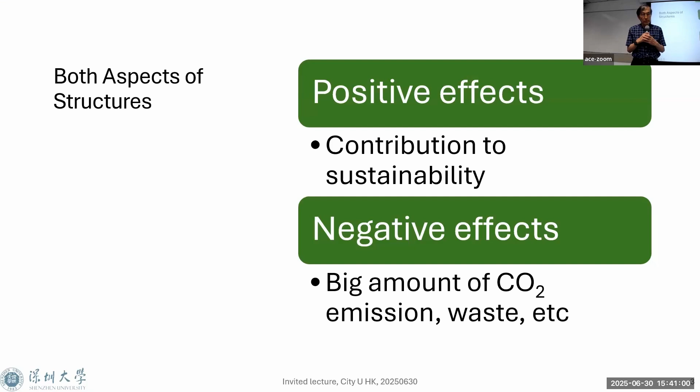So it's about various issues, like zero hunger, quality education, gender equality, but at least goal 9, industry, innovation and infrastructure, from the name of the goal you can tell is related to civil engineering. Also sustainable cities and communities is closely related to civil engineering. Climate action, this is net zero, carbon neutrality. But what I'm going to tell you is something

more. Once you say sustainability, most people think about environmental issues. But in fact, sustainability is quite a broad concept, which has three pillars: social, environmental, and economic sustainability.

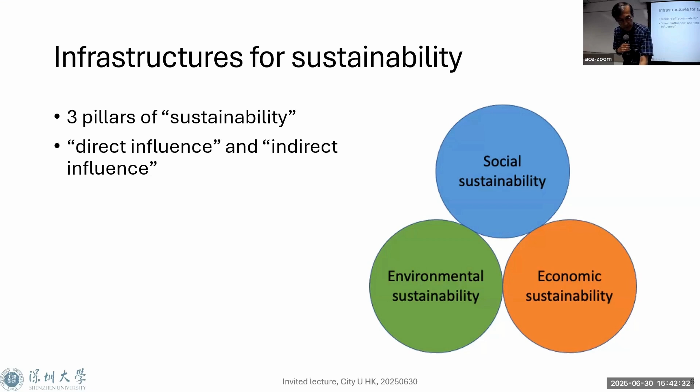This is another paper, which you can find in Nature Sustainability, Infrastructure for Sustainable Development. This paper looks in detail at how infrastructure can contribute to the SDGs. As I said, the SDGs have 17 goals, but under the goals we have targets. Targets show more quantitatively how to achieve the goal. So altogether, 169 targets.

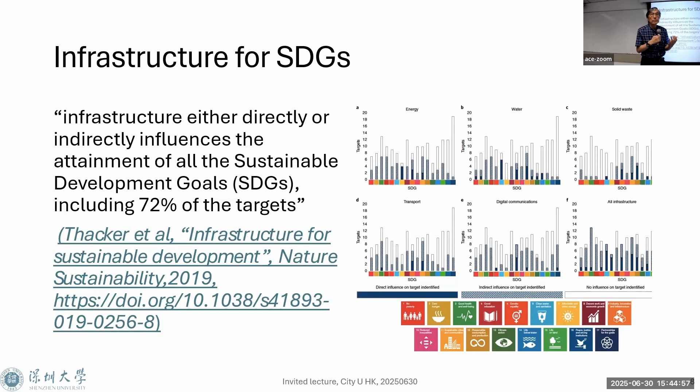In each small figure, the black part indicates infrastructure can directly influence achieving that particular target. The gray one indirectly influences achieving such targets. Then altogether, 72% of targets are influenced by infrastructure. Then you can see all the gray parts. You can find all of the 17 goals, even gender equality and quality education, and how infrastructure influences those goals.

This is a document more related to civil engineering. The author is Andrew Minson, Global Cement and Concrete Association, an international industrial organization for the cement and concrete industry. He examined very precisely how concrete or concrete structures influence every one of the 169 targets. His conclusion, of course, is his own analysis, not the UN's, but 48%, nearly 50% of the 169 targets will be influenced by concrete or concrete structures.

Then how can gender equality be achieved by concrete or concrete structures? How can education quality be achieved? This is one example. In many developing countries, schools don't have clean toilets. Boys don't care, but the girls are ashamed to go to school because there are no clean toilets. So with concrete as an inexpensive material, together with bricks, you can build clean, neat toilets so that students can go to school. It's good for gender equality and quality of education.

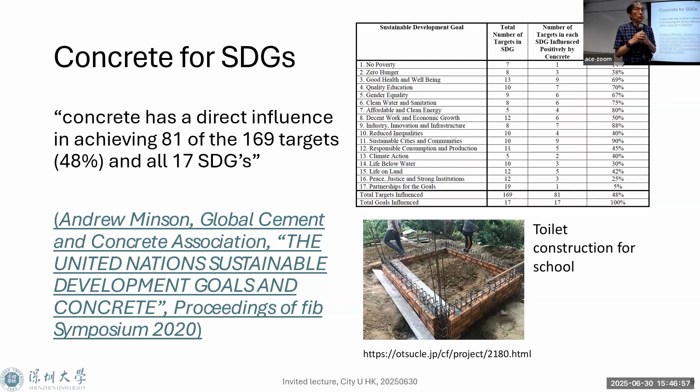The same paper looks at those listed papers in different aspects. Which pillar they're looking at: social, economic, or environmental. In the past, sustainability meant only environmental issues, so most papers look at environmental issues, not economic or social issues. But this is quite natural, I think. Another aspect, once you look at the structures, is which stage of the structure: planning stage, construction stage, usage stage, demolition stage.

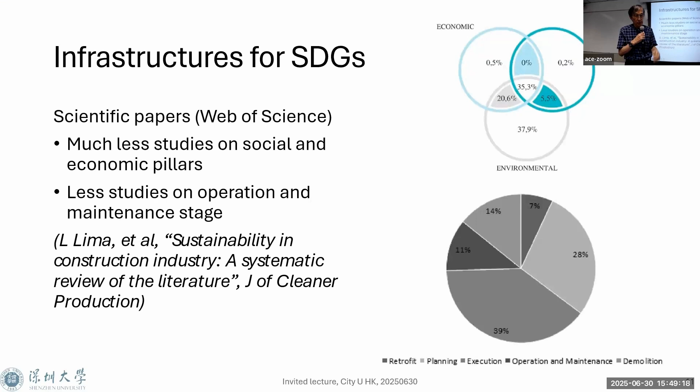Especially, I have to emphasize China. I think this statistic, I don't know if it includes Hong Kong or not. China alone, their construction market is more than 50% of worldwide construction. So China is really constructing a lot.

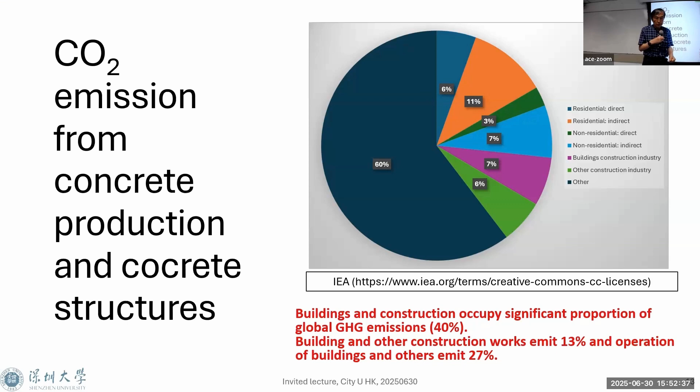After construction, during the usage stage, we emit a lot of CO2. This is another way to look at CO2 emission, by sector in different categories: 6% from cement, 8% from steel. Cement is 100% construction industry, but steel is not only construction industry, majority construction but also other industries. So cement is quite a big component of CO2 emission, so we have to take some serious measures as civil engineers.

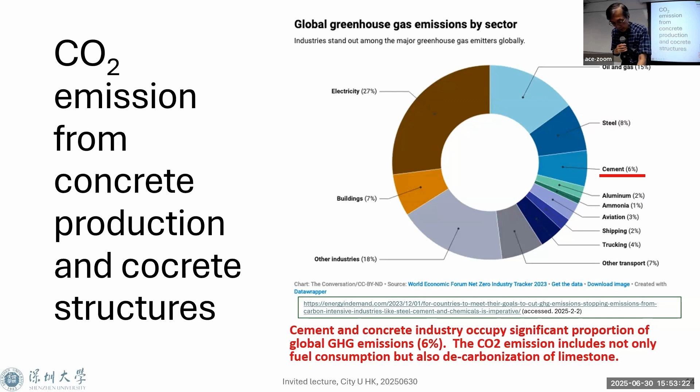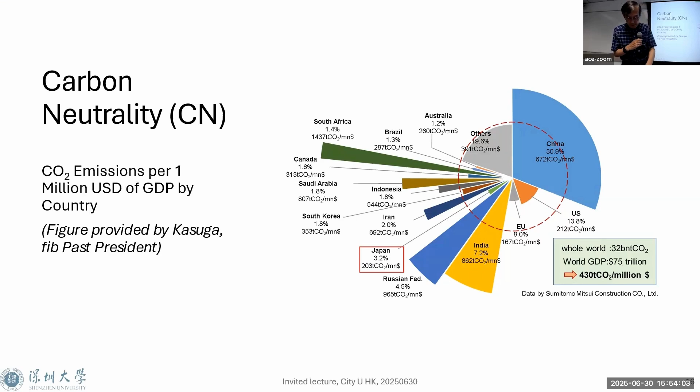But some good news for China: CO2 emission per unit economic activity has reduced drastically in recent years. The latest figure in this diagram is from 2017, but the real latest statistics show the level of CO2 emission per unit economic activity is very similar to the EU, Europe. So China really developed relevant technology, and in this sense it's almost the same as a developed country.

I found another interesting book. It shows how China faces challenges to achieve net zero in terms of energy. Probably you know China is the best country for wind energy and solar energy, extremely big energy production. But China itself has some difficulty achieving net zero because of coal power plants. You still need a lot of electricity coming from coal-fired power plants.

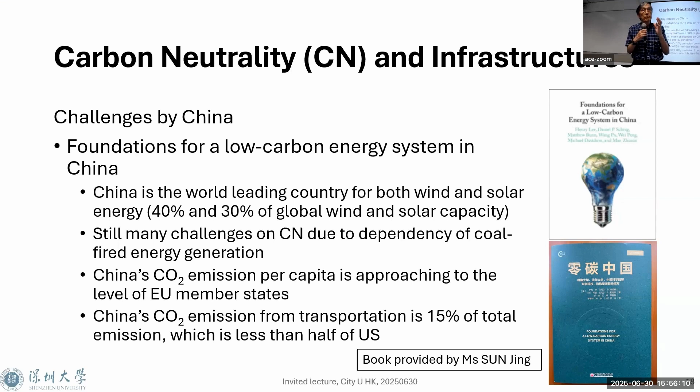If you compare with the United States, CO2 emission from transportation in China is much smaller than the US. Similar size of country, but transportation CO2 emission in China is much smaller than the US, meaning you have rather good public transportation compared with the United States.

Carbon neutrality, in terms of the size of the construction project: this analysis indicates that if you have a bigger project in terms of money, your CO2 emission also becomes bigger. It's quite a proportional relationship.

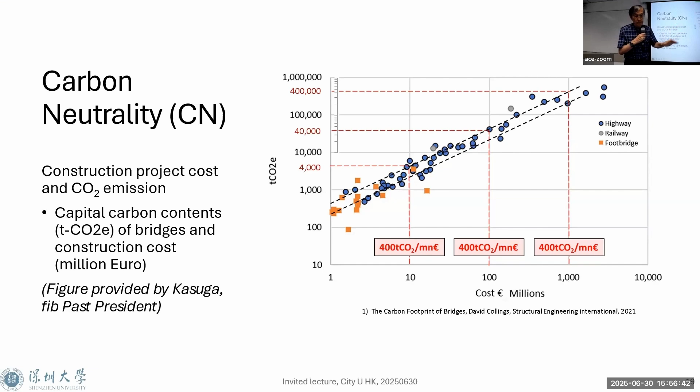This information is given by the World Economic Forum Net Zero Industry Tracker. They picked up some industries, including cement and steel. What are the key issues to achieve net zero by 2050? They have 5 important factors. One of them is infrastructure, which is quite important for those industries to achieve net zero.

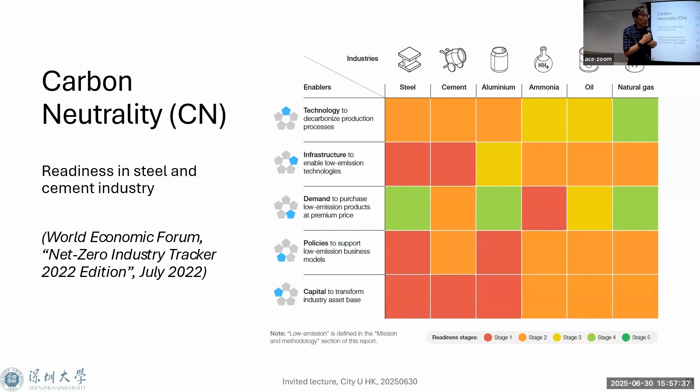This is a more precise analysis for the steel and cement industry. Green means they are ahead, at a rather advanced stage. But cement and steel are mostly red and orange, so it's quite still at a primitive stage. We have many things to solve.

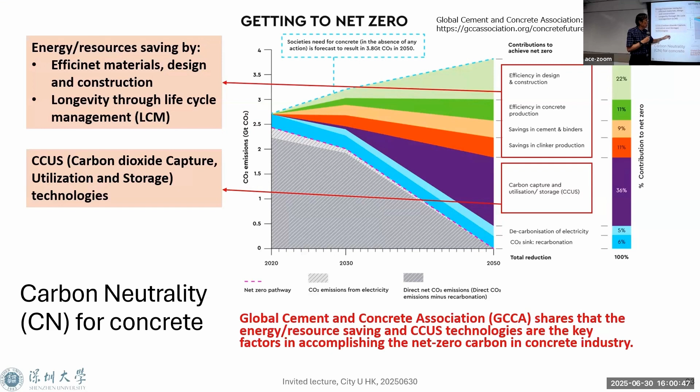A quite big portion comes from life cycle management, good maintenance, good intervention. This is what I'm talking about later today. Also, as the previous slide indicates, some material technology, CO2 capturing new material, and storage facility also needs concrete. So altogether, somehow they believe we can make net zero by 2050.

And this is a slide for steel. I'm not really an expert in steel, but the steel industry has a lot of relevant technology: reducing CO2 emission during steel production using hydrogen rather than coke, using green electricity, capturing CO2, using recycled steel. In fact, steel is a very, very recyclable material compared with concrete and cement.

Steel itself is a main material for infrastructure. So for all the relevant infrastructure to achieve CO2 emission zero, we also definitely need steel.

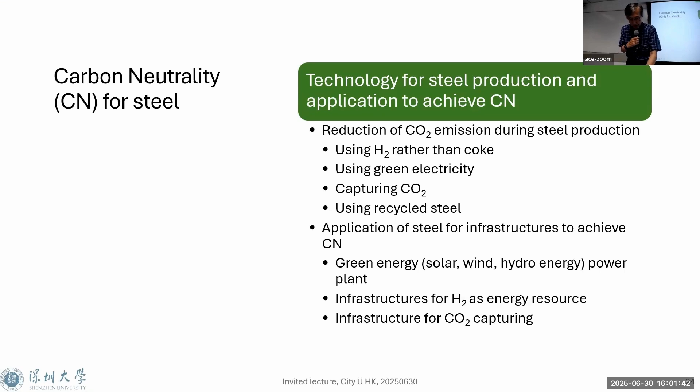This slide gets to my main agenda today. So far, what I've said, like cement industry technology or steel industry technology, this is only the production stage—how you reduce CO2 emission during concrete production, cement production, steel production. So this has been their main concern so far.

During the construction stage, yes, we also emit CO2, but compared with other stages, it's not such a great amount. At this moment, we have many studies on how to minimize CO2 emission during construction.

But we don't have much studies on this—during use. Buildings and other infrastructures have a life of 100 years, more than 100 years. During that period, naturally, we have a lot of CO2 emission.

At the construction site, we have repairment, refurbishment, right? Some maintenance—it's also part of kind of construction work. So we have to carefully consider those maintenance plans so that we can minimize CO2 emission.

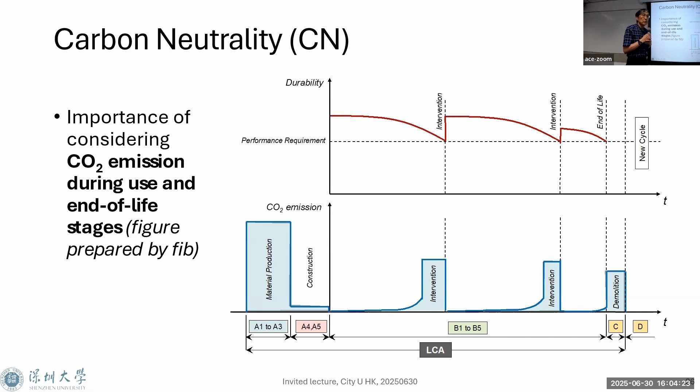The mid-90s was quite a big construction market in Japan. At that time, Japan was #1, bigger than the US, bigger than China. But after that, our construction market became very, very small. I don't have to talk about it much.

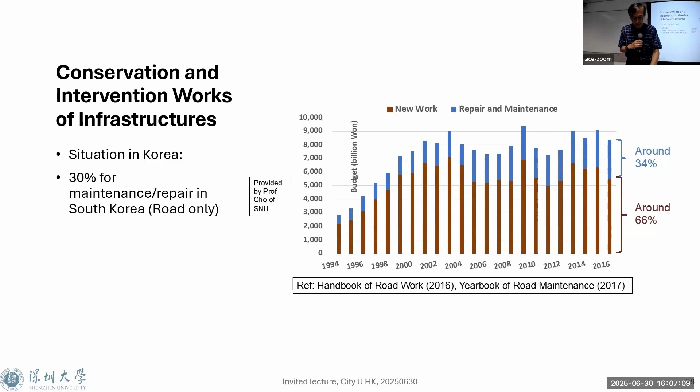And UK, this is a country, I believe, they developed the infrastructure nationwide first, probably. There are subways since the 19th century. Many, many bridges. Their first steel bridge or iron bridge is 250 years ago. In such countries, we still need new construction. They nearly need to reconstruct old construction structures.

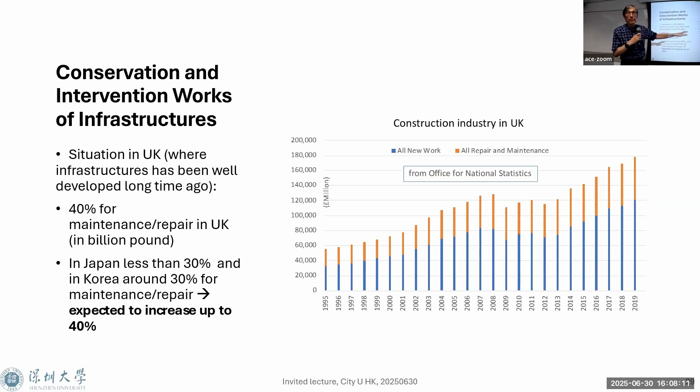But this orange part is maintenance. So this country, UK, about 40%, nearly 1/3, is going to maintenance repair. So this is indicating most of the countries like China and Japan, their future is something like this. So about 40% is maintenance repair.

Then coming to the Japan Society of Civil Engineers. I have been involved in this society for many decades. And in recent years, we have some activities for carbon neutrality.

So this is indicating current technical activities related to carbon neutrality. Many technical committees, they are looking at carbon neutrality in different aspects. And also our monthly magazine, one time, about nearly 4 years ago, they had a special issue on carbon neutrality.

And the AIJ, this is Architectural Institute of Japan, and Japan Society of Civil Engineers, two big organizations in the construction field. We have collaborative work on carbon neutrality. Sorry, this is in Japanese, but it is in a special issue in the JSCE monthly magazine, how carbon neutrality can be achieved by 2050.

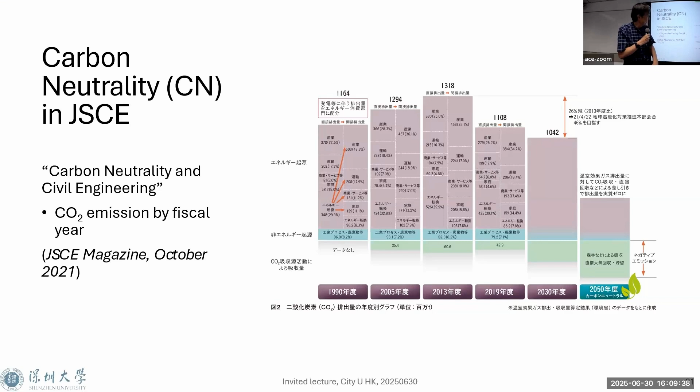This is the general overall scenario. And this is indicating how civil engineering can contribute to carbon neutrality in many aspects: industry, mobility, town, home, energy, and others. In many aspects, civil engineering needs to contribute to carbon neutrality.

Then also JSCE, 3 years ago, they published one small booklet to show how society or the nationwide social system is related to infrastructure or civil engineering. It's kind of the nationwide community network, including transportation or so on.

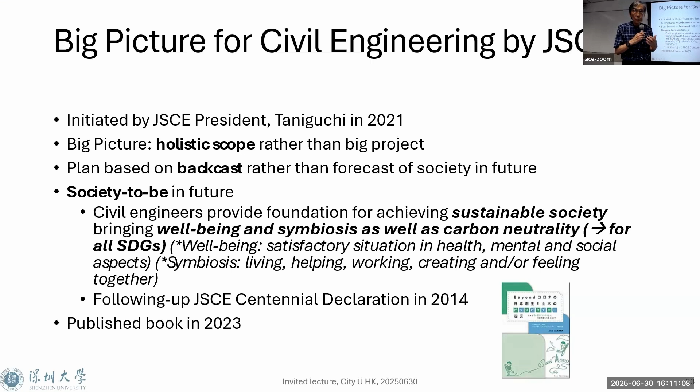Then they are saying we have to provide the foundation for achieving a sustainable society, bringing well-being and symbiosis as well as carbon neutrality. The JSCE, as a representative organization, shows the Japanese society how our future landscape should be.

Then this is another piece of information. Carbon neutrality is not free. We have to pay additional cost. Several articles say we need something like 6% more cost compared with overall economic activities. So we have to pay a few percent up to 6%. This is the additional cost to achieve carbon neutrality.

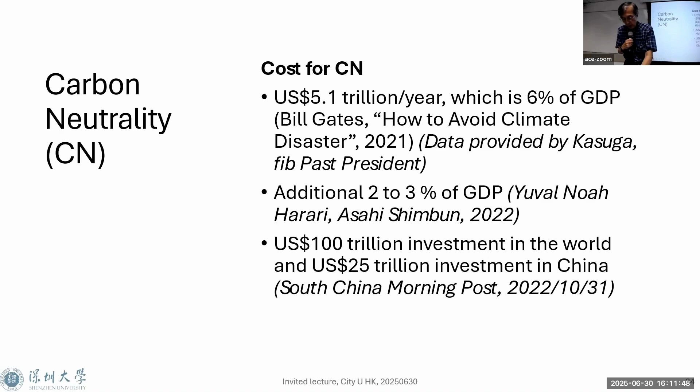Then this is the summary: contribution of infrastructure, life cycle management of structures for carbon neutrality, green materials, execution, maintenance, intervention, demolition, or so on, and infrastructure. So the summary is how structures, how civil engineering can contribute.

First one, life cycle management, good maintenance, repair. And also green materials, execution, and demolition, and so on, and also circularity. And also infrastructure itself, we need it to achieve carbon neutrality. Lots of infrastructure, relevant infrastructure.

And also transportation system. Yeah, this is not today's issue, but we have some transportation systems which are suitable for carbon neutrality, and national land planning. It is community network, how we allocate big cities, small cities, and how they are connected, this kind of thing.

So this is my main issue: extension of service life of structures. Once your service life becomes 3 times longer, then carbon emission, CO2 emission becomes 1/3, right?

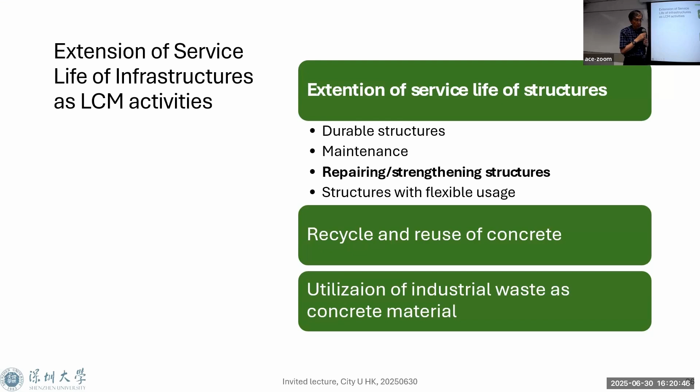And this is somehow relevant technology, a very small summary. To have good maintenance, we have to predict your service life, how to predict the service life of structures. And also assessment of the current structure performance. You need a good inspection system.

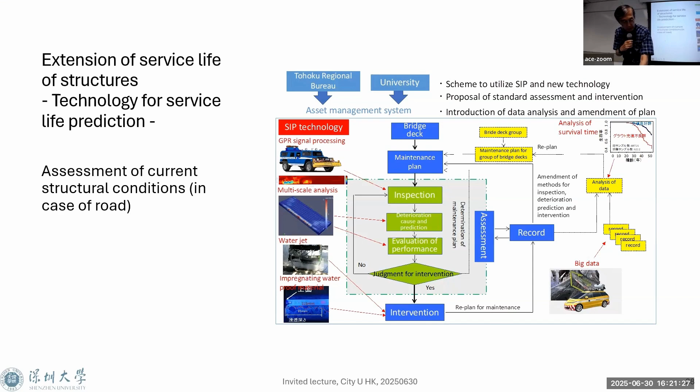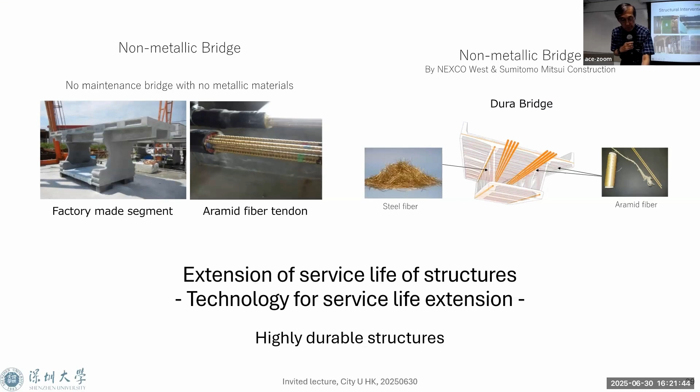Recently, we have a lot of relevant technological advancement. And I don't have to say, once we have provided maintenance-free material, very highly durable material, of course, it's also good. And this is showing some typical structural interventions, which I'm talking about today. We have various ways of interventions using different materials.

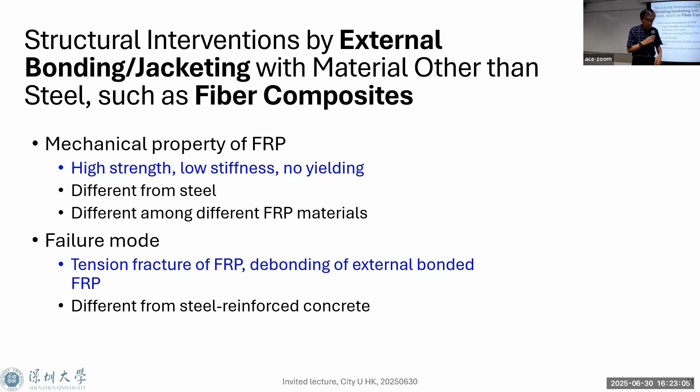The failure mode is also different from ordinary reinforced concrete. Once you use FRP reinforcement, breakage becomes a failure. And also, once you have external bonding, debonding is another failure mode. So they are different from ordinary steel reinforced concrete. Then we have several key issues: shear strength and ultimate deformation, debonding, and long-term performance.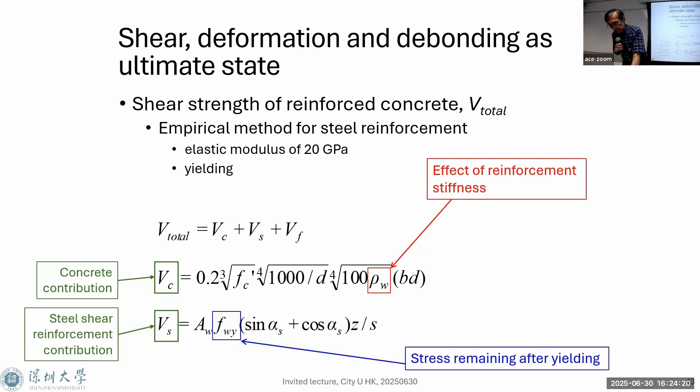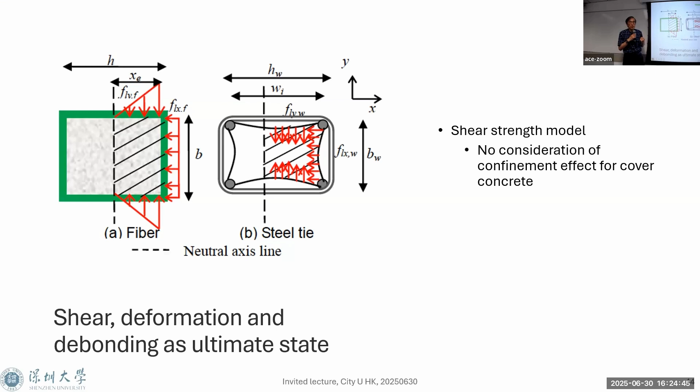Then we have jacketing like this. We jacket or wrap tension material surrounding the concrete. Then we have some confinement effect from the wrapping material, which does not exist in ordinary concrete structures without wrapping. For seismic performance, we have to know the ultimate deformation, but we don't really have a commonly accepted model to predict ultimate deformation, which is quite important for seismic design.

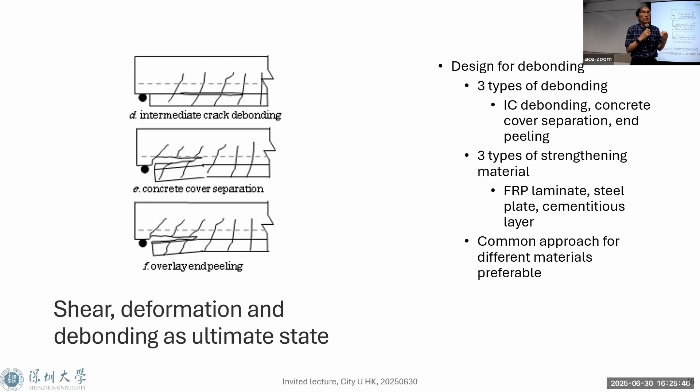Then in the external bonding case, we have several debonding modes. Not only one mode: we could have debonding here, or we could have debonding we call concrete cover separation, or we could have debonding like this. Each debonding type has a different mechanism, so it makes it very complicated. Debonding happens at a certain location, it can be the central part of the beam or the end of the beam, so you have to be careful where debonding takes place.

Debonding takes place at the adhesion interface, or within the substrate concrete, or within the adhesive material itself, or within the strengthening material itself. So you have to look very carefully at where the debonding location is. In fact, debonding is very complicated.

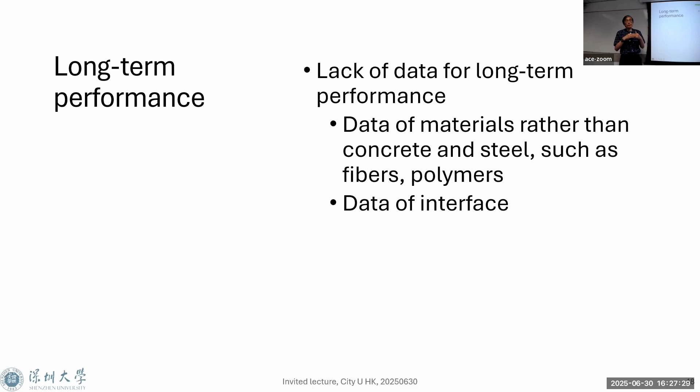Then long-term performance, I talk about it only with this slide today. We don't have much information. FRP is one of the main materials, but we don't have accumulated knowledge or information on long-term performance. Probably the only available data is a 30-year exposure test. So we don't know the 50-year or 100-year life of FRP. And not only the material, but also the bonding interface properties: we don't have much information on long-term interface behavior.

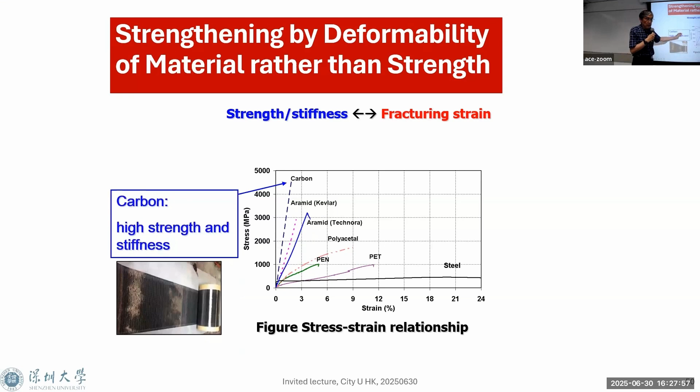Then the first issue, shear strength and ultimate deformation. These are various tension reinforcements. This is steel and carbon, with quite different stress-strain relationships. We try to utilize them as reinforcing material. Carbon has high strength and high stiffness. The other extreme is steel, low strength and low stiffness. In the middle, you have medium strength and medium stiffness.

What I can say is high strength material is usually expensive, and lower strength material less expensive. So high cost, low cost. But you shouldn't forget this point: high strength, but the fracturing strain is very small. Low strength, usually the fracturing strain is very high. In fact, not only strength, we have to utilize fracturing strain. Stiffness and strength can be replaced by a lower strength and stiffness material if you provide a larger amount. So high strength material is not absolutely necessary.

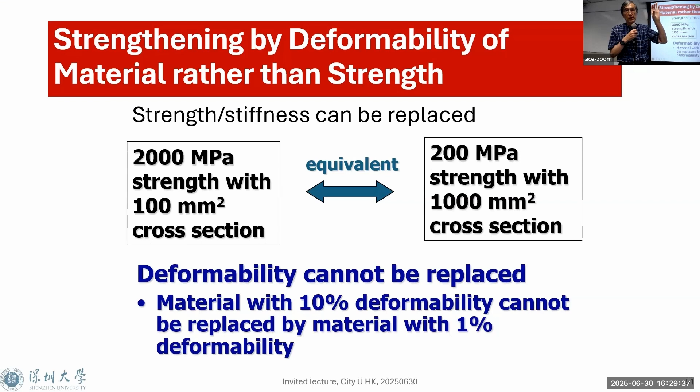But if your design says we need deformability of the material, high deformability cannot be replaced by less deformable material. So deformability is one of the key issues for seismic performance. High deformability could be a better option than high strength and stiffness in terms of seismic performance. Then a new retrofit method: durable and low cost, using fiber material with high deformability for shear reinforcement.

Yeah, in fact, what does this TV camera show? It's okay? Yeah, yes, someone is working. I see, okay.

Like this one, this is carbon like this, steel like this, but as shear reinforcement, we need a big fracturing strain to achieve shear reinforcement until the ultimate deformation. Steel doesn't break, but its stiffness becomes very small. So to have a good shear reinforcement effect, stiffness is also important, but it cannot break like carbon. So a material between steel and carbon is the best option for shear reinforcement. Knowing this fact, we utilize highly deformable material at the hinges, which need more deformable material.

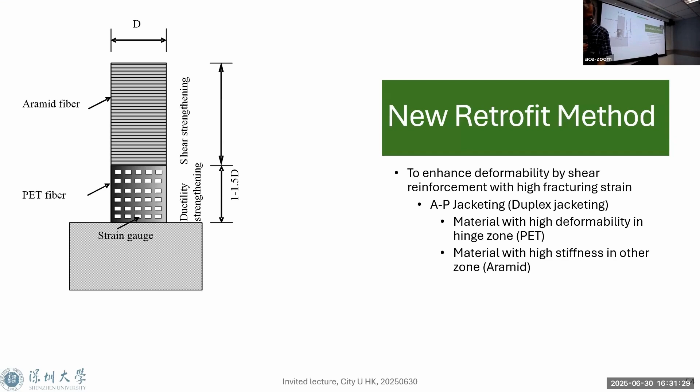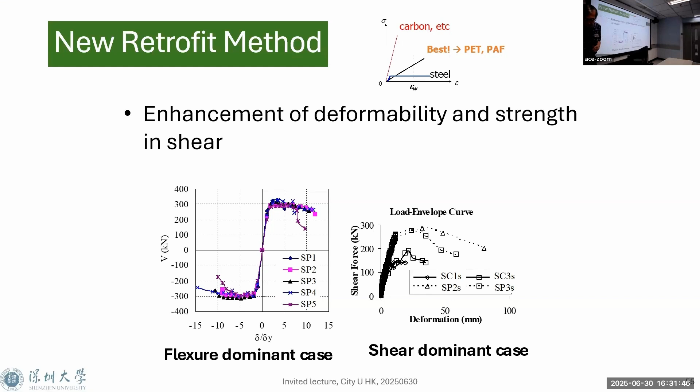Then once we use the deformable material, which is PET fiber, we can have better seismic performance, like this. So the specimen with PET fiber shows better performance than the carbon and the reference specimen. The specimen with PET fiber is like this, the carbon is like this, and the reference specimen like this.

So if your shear reinforcement doesn't show breakage, this is perfect. But you better still have rather high stiffness. Steel reinforcement shows no breakage, but yielding, so the stiffness becomes much less. This shows some experimental results. This PET fiber deforms greatly like this, but no breakage. If this is carbon, definitely the carbon breaks.

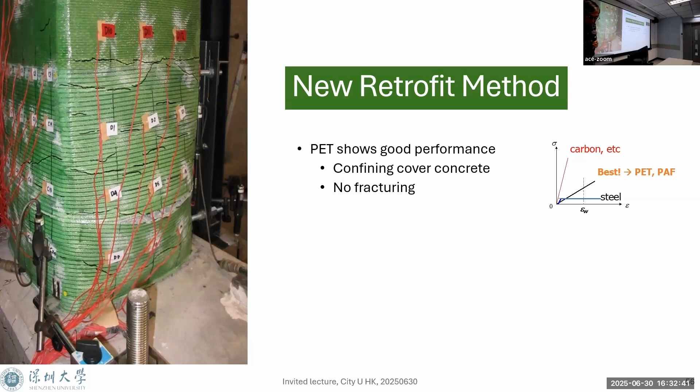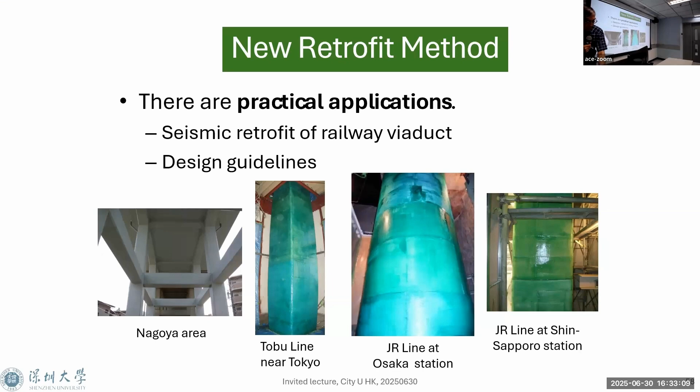And PET fiber is cheap, you can understand, right? PET is not expensive. So PET fiber is much less expensive than carbon or aramid, so the construction cost and material cost is cheaper. So in Japan, we have PET fiber real application like this. So the optimal property is not only stiffness, but also deformability. This is quite important.

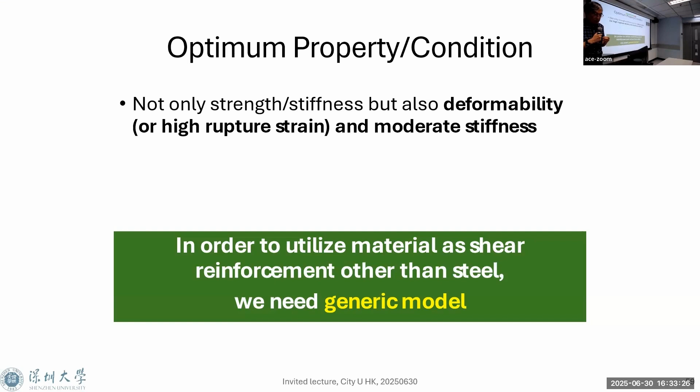Then to deal with this kind of different mechanical property of the material, we need some generic model. So to have a generic model, our research group proposed some model which can predict shear strength and also a shear deformation model. Probably I may not go in detail. And also a flexural strength model and a flexural deformation model.

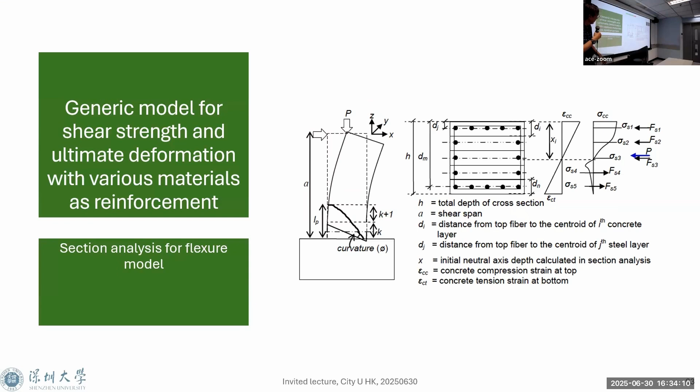So we combine them, considering each material's stress-strain relationship, and we utilize typical sectional analysis, and we consider the contribution of each component to the shear strength. Then we have the concept of potential shear strength depending on the deformation. So once we have greater deformation, meaning greater strain development and less stiffness, the remaining shear capacity becomes less.

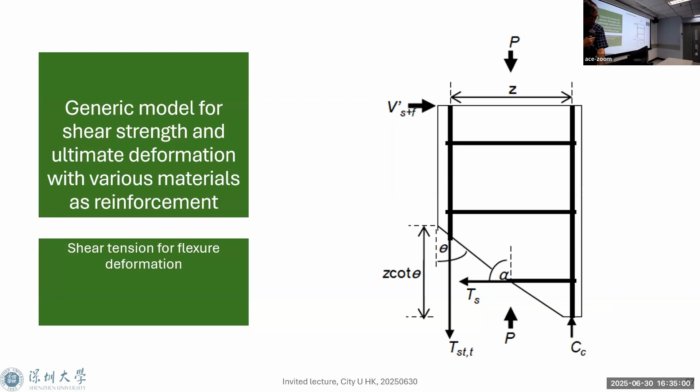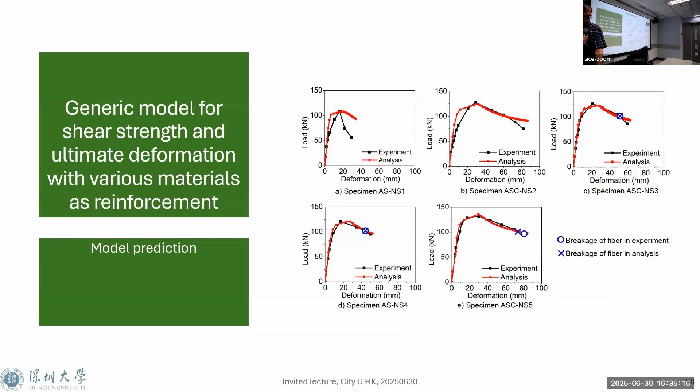And we also consider shear deformation utilizing a simple truss analogy. Then we can also consider tension shift in the tension reinforcement, which produces additional flexural deformation. Then this is the model prediction. Our model predicts, except this case, quite nicely for the post-peak region. So we can predict ultimate deformation, which is necessary for seismic design. The prediction and the experimental result agreed.

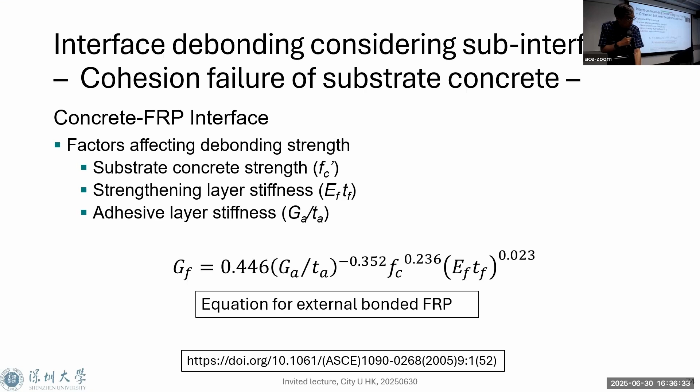This is an early contribution of Professor Dai Jianguo. He proposed this formula for his PhD study, in fact. Based on his study, better debonding strength comes from the softer adhesion layer. So a softer adhesion layer in the bond stress-slip relationship shows a much higher peak stress. But this is only true for the substrate concrete debonding case.

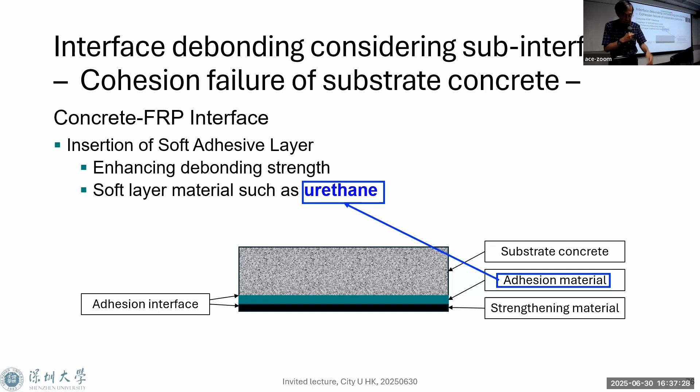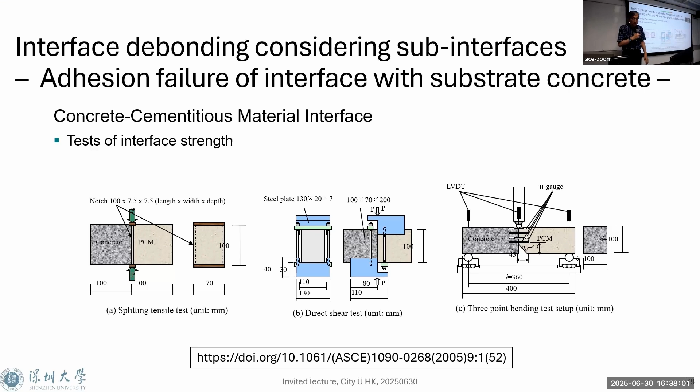Then, knowing this fact, some technology was developed using quite a low stiffness of the adhesion layer, such as urethane, so that you can have higher debonding strength. So a softer adhesion layer is one way to increase debonding strength. Then another debonding failure mode: debonding at the interface between substrate concrete and the adhesion material. We have another study looking at debonding strength for cementitious material failure. In this case, debonding takes place clearly at the interface between two materials.

In this case, concrete strength and interface roughness are the main factors, once debonding takes place clearly at the interface between two materials. In the previous case, debonding takes place within the substrate. If debonding takes place within substrate concrete, roughness doesn't matter. But at the real interface, roughness does matter. So this is the experimental result. As roughness increases, the bonding strength increases. But once roughness reaches a certain amount, about 0.5 millimeter, the bonding strength becomes constant.

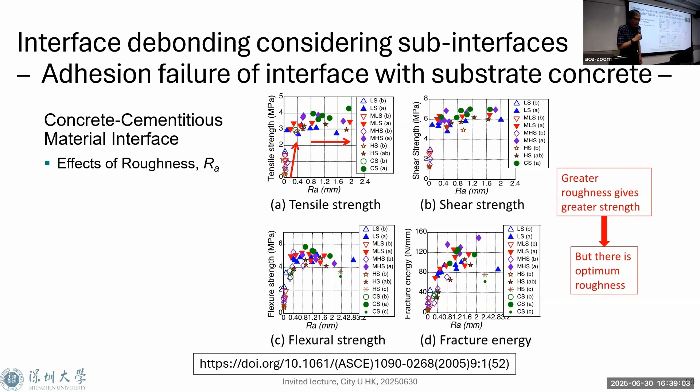Another interesting thing: if you have high strength concrete, the bonding strength becomes smaller. Because in this particular case, polymer cementitious mortar, polymer is one of the mechanisms to strengthen interface strength. But polymer cannot penetrate into high strength concrete. So to have better penetration, lower strength concrete is better. Lower strength concrete gives you higher bonding strength. It's something surprising. So again, strength doesn't work.

Then this is the case. Yeah, this is an external bonding FRP sheet. In the FRP sheet case, usually the debonding takes place in the substrate concrete. But when substrate concrete strength becomes very high, like 90 megapascal, then the debonding takes place at the interface, the adhesion interface between the adhesion material and substrate concrete. So if this is the case, roughness does matter. Greater roughness gives you higher bonding strength.

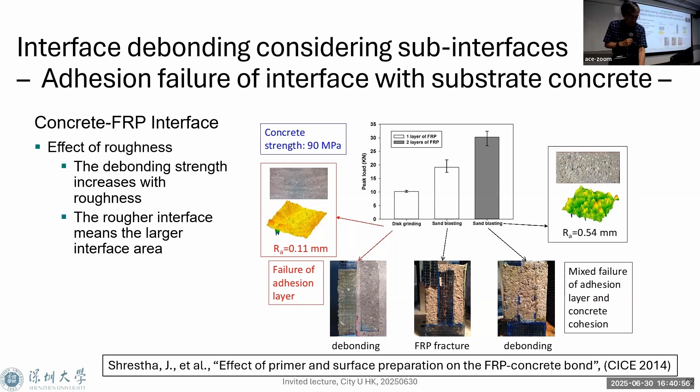This is different from the Ueda case. In the Ueda case, substrate concrete debonding. But this one, adhesion interface debonding. So surface roughness only affects in case of the real interface, the adhesion interface. Right, then debonding at the adhesion material layer. So the debonding takes place this time within the adhesion layer, within this one.

Then what happens? Earlier, as I said, if the debonding happens in the substrate concrete side, a softer adhesion material layer gives you higher bonding strength. But if the debonding happens within the adhesion material layer, softer material gives you smaller bonding strength. So again, it depends where your debonding takes place. So you can get completely the other outcomes.

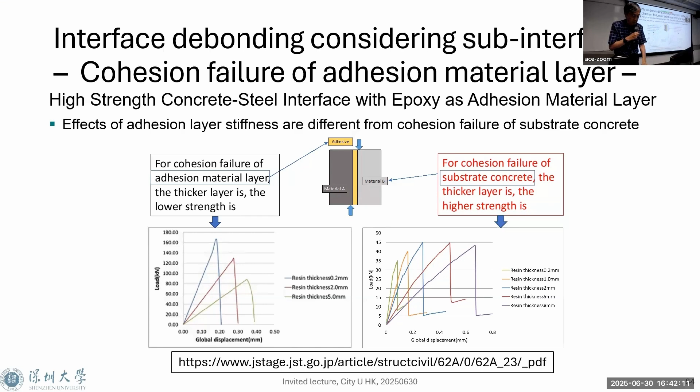In this case, a soft adhesion material layer doesn't work. But in this case, if the debonding takes place in the substrate concrete, a soft adhesion material layer does work. Okay. Then even in this case, if both sides are very high strength, the debonding takes place within the adhesion material layer.

In this case, usually this is a polymer. The polymer is confined, restricted in its shrinkage. So prestress is introduced within the material layer. So it affects and reduces the bonding strength. So we have many other aspects as well.

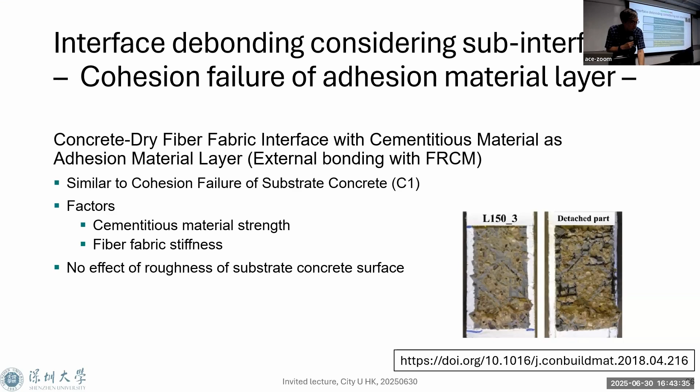Then this is a debonding case in terms of concrete with a dry fiber fabric piece with cementitious material. In this case, debonding takes place within the adhesion material. In this case, the adhesion material is a cementitious material, same as substrate concrete. So if debonding happens within cementitious material, like concrete, then the debonding nature is similar to the first case. So you have to be very careful where your debonding takes place.

The last one, debonding at the adhesion interface between the adhesion material and the strengthening material. So this time, debonding takes place between the tension material and adhesion material. In this case, I only found one case. In this particular case, the extent of cementitious material impregnation into the fiber bundles is one of the key parameters. More impregnation, the bonding strength becomes higher.

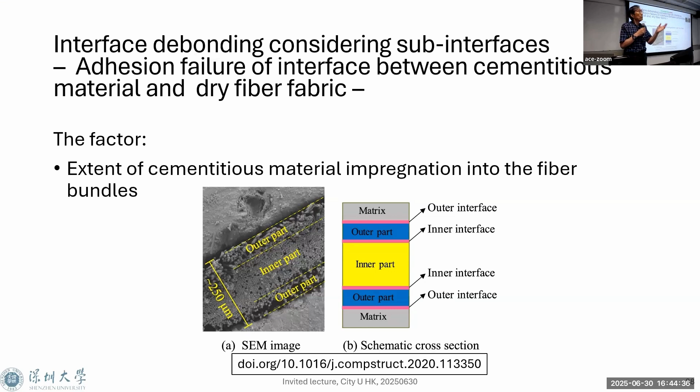So you have to be very careful where your debonding takes place. The controlling parameter is quite different in each case. Your conclusion may be completely wrong. So you have to be very careful.

And some other debonding issues, external bonding issues. Two issues here. The first one I briefly introduced. Yeah, debonding is a main issue, but recently, in a collaborative study, a Japanese university and a Japanese company found that with external bonding of the carbon fiber sheet, we can completely prevent the debonding. How do we prevent the debonding?

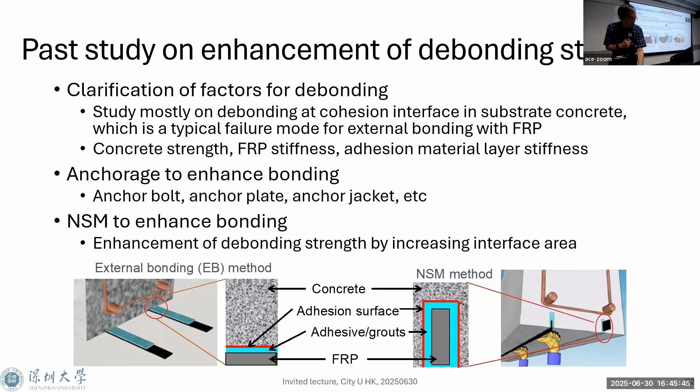Now, this is the usual way, external bonding like this, an FRP plate attached to the tension face. And the better way, we call it NSM, near surface mounted. We make a small ditch like this, a groove, then we insert the tension material. But even with NSM, you cannot avoid debonding. But with our new technology, we fold the sheet like this, then insert it in the groove to increase the interface area. Then, as a result, we can avoid debonding.

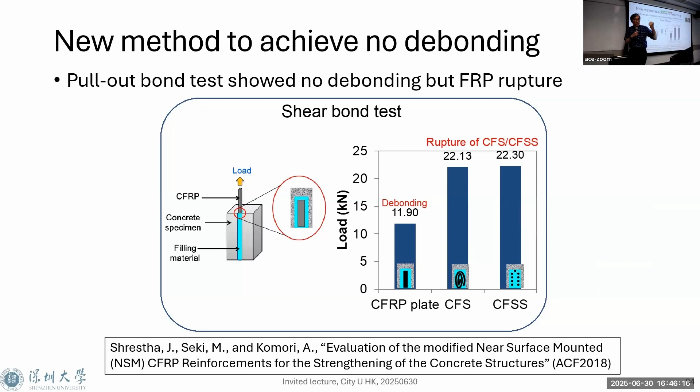So no debonding. The ultimate failure mode is fracture of the carbon fiber. Not only in the pull test, but also the beam test, the ultimate state is rupture of the carbon fiber sheet. So it's a perfect 100% utilization of the carbon fiber strength. So we are successful in avoiding the debonding.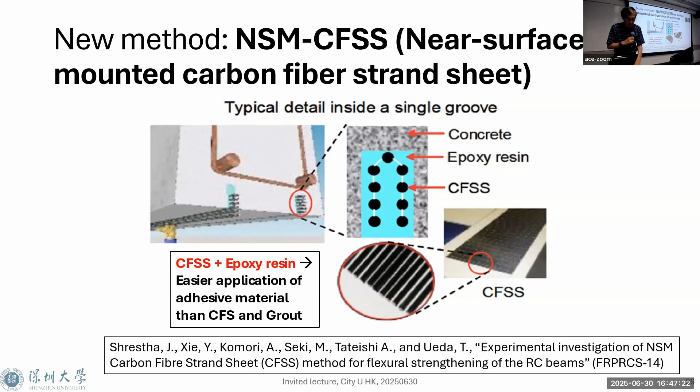Then our proposed technology is like this. This is a Japanese product. I think in China I found some similar product, but not really practically applied yet. Each sheet consists of a composite of very small CFRP bars like this, and they are connected to each other to make a sheet form. Then we fold this sheet, we call it the carbon fiber strand sheet, into the groove. Then we make an NSM. This is our proposed way.

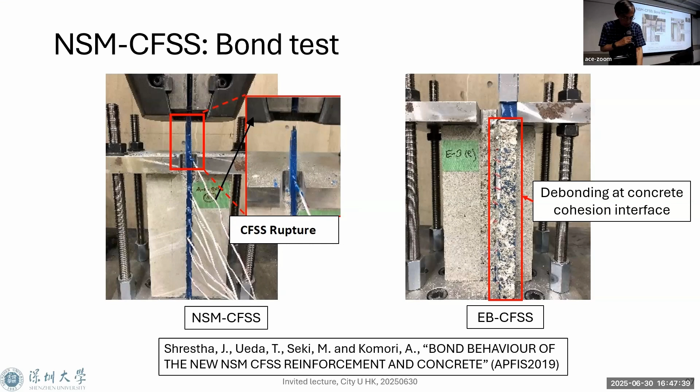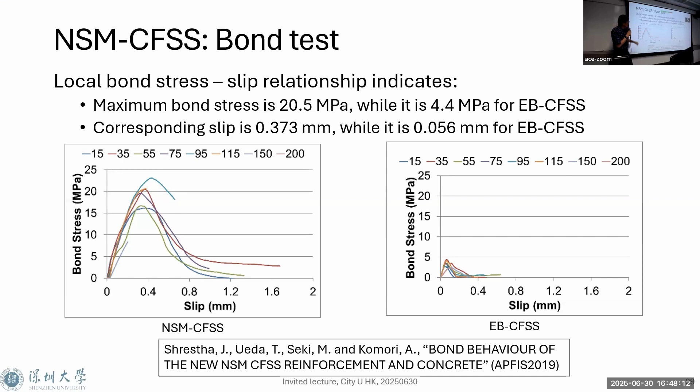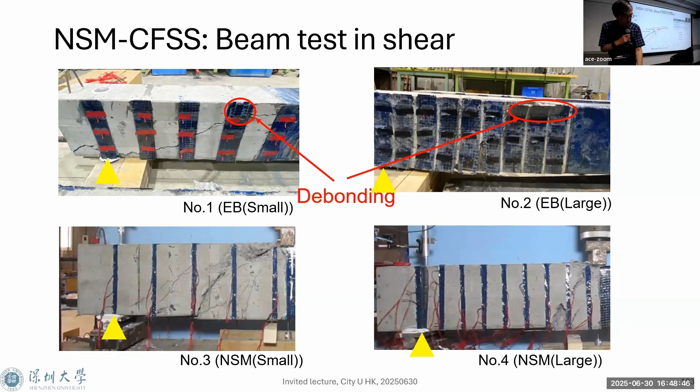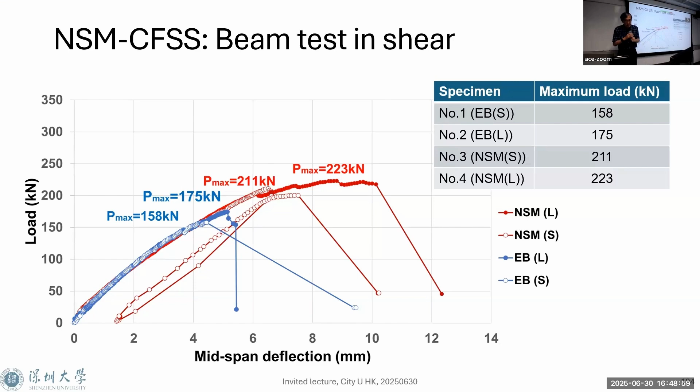And in this particular case, the increment is not great, but our new proposed technology NSM-CFSS achieves better, higher shear strength. Then we can utilize this technology to strengthen this part for shear reinforcement for the T-beam like this.

One more newly developed concept. For repair, this is an ISO document. We have many intervention principles or remedies, from 1 to 12. We have different purposes: protection against ingress, or structural strengthening, or this kind of thing. Measures for concrete defects and deterioration, measures for steel reinforcement corrosion, and strengthening.

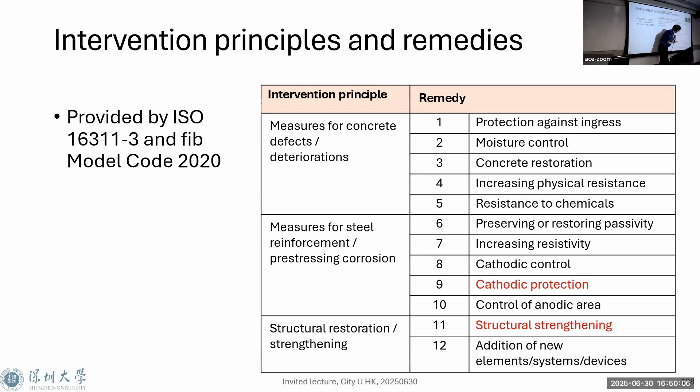Then, the new concept is that with one particular repairing method, we can achieve more than two remedies. For this particular case, using carbon fiber fabric, we can achieve structural strengthening, like the strengthening I have been talking about, and it can also be used for cathodic protection. So dual function.

Then we conducted many experiments to prove cathodic protection does work, but we have some degradation. Instead, due to the ICCP, the impressed current deteriorates the carbon fiber itself, in fact. But somehow, the fortunate part is once you have a chloride environment, deterioration becomes much less. It's something of good news.

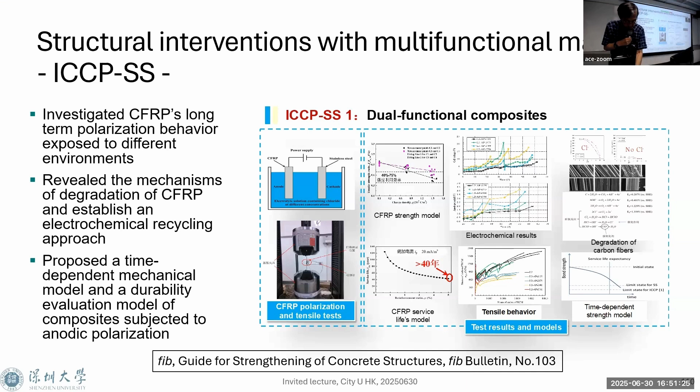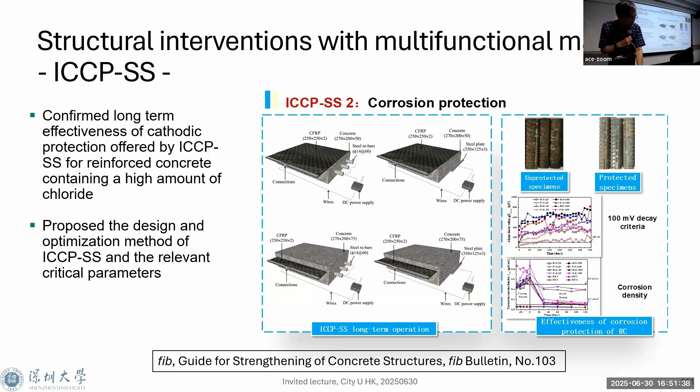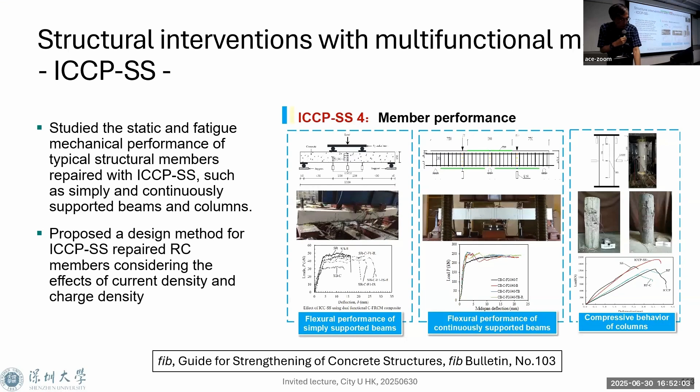Then we conducted various experiments; the right top here shows cathodic protection does work, and also some bond tests. We observe some deterioration, as you can see here, but once we can predict how much deterioration we have, we can have it nicely designed. And also we conducted many beam tests, column tests, and we have some practical applications of this ICCP-SS.

So this is a new concept, dual purpose. I have never seen something like this. All the repairing methods are single purpose. But this is dual purpose. This is also another new direction.

Then my last issue is standardization for life cycle management and carbon neutrality. Life cycle management is still a new concept in our structural engineering community, civil engineering. Also, a holistic framework: we have to achieve carbon neutrality, but in the civil engineering field, we don't have a really well-developed system for CO2 emissions, especially during the life cycle.

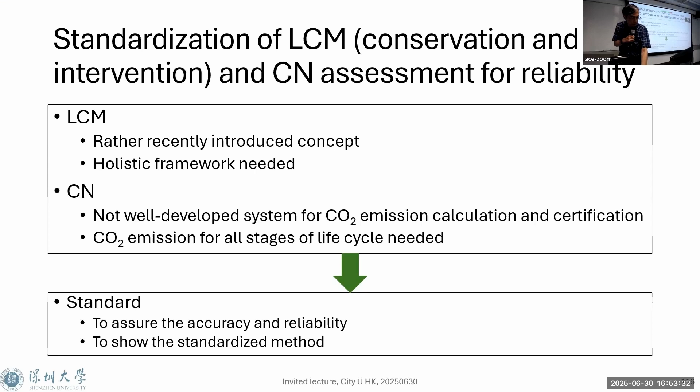To improve the current situation, standardization is necessary to assure the accuracy and reliability and to show the standardized method. At this moment we have too many methods for repairing. We should have something standardized. Then there's a lack of reliability due to lack of data, too many interventions, a big variety of structural details, a big variety of structural materials. That's why I ask, what is the optimum material property? We don't know yet.

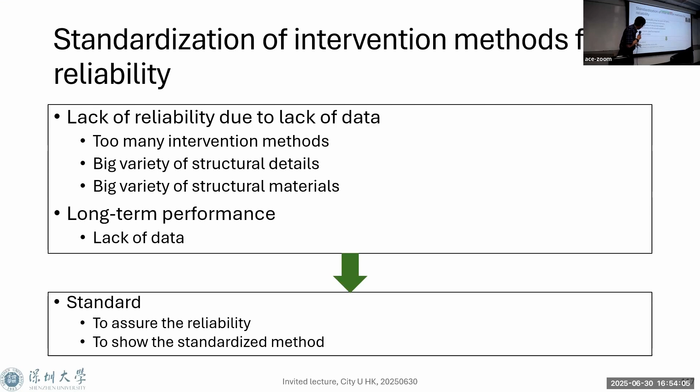Long-term performance, which I didn't talk about today, we don't have data on at all in many cases, especially the interface. So we need standardization to assure the reliability and show the standardized method. For this purpose, ISO, the International Organization for Standardization, has one technical committee dealing with all kinds of concrete issues. In fact, I'm chairing this technical committee at the moment. Subcommittee 7 is maintenance and repair, SC8 environmental management, like carbon neutrality issues, and working group 1, life cycle management. So the concrete community in ISO puts its best effort into international standards.

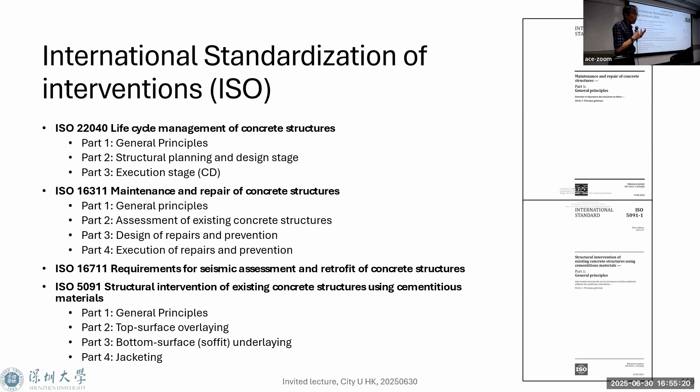This is a recent example, life cycle management of concrete structures. We already have some ISO documents available. The maintenance and repair of concrete structures is available, and this is a kind of umbrella. Then this is the particular repair and structural strengthening interventions ISO code, using cementitious material, as I said, externally bonded cementitious material. Some ISO documents are available.

Then fib, the International Federation for Structural Concrete, also put effort into the code, Model Code 2020, just published two years ago. The first international standard for both new and existing structures. In Hong Kong, do you have any standard to deal with both existing structures and new construction? I don't think so. But the fib Model Code covers both, so it contains a lot of intervention and maintenance issues. If you have some interest, please purchase the code.